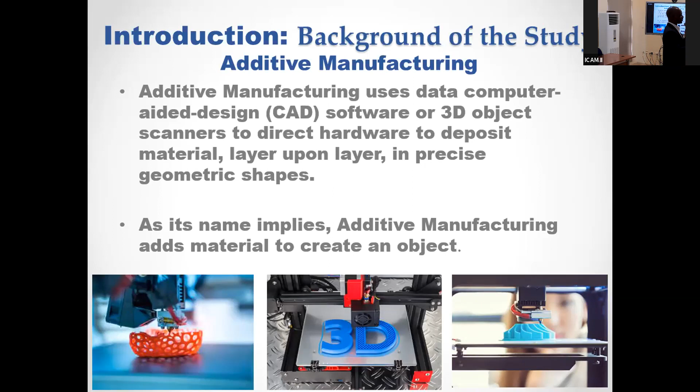We have been seeing that since we came here. Now, what is the process here? There are two processes involved, either fusion-based or solid-state-based. Our approach is additive friction stir deposition, under mechanical deformation based. So our work is to combine AM and friction stir welding. It is a combination of the two, and that forms the base of our study. Okay, next slide.

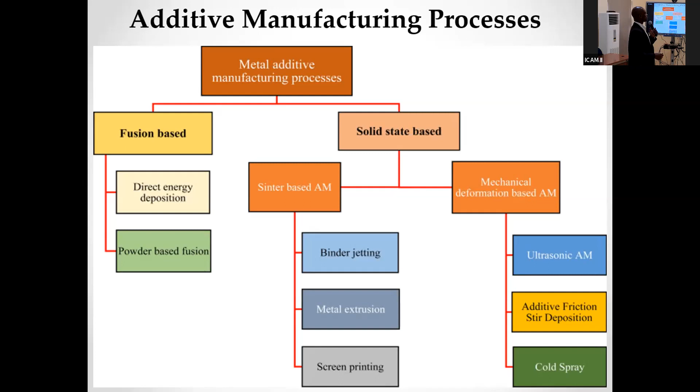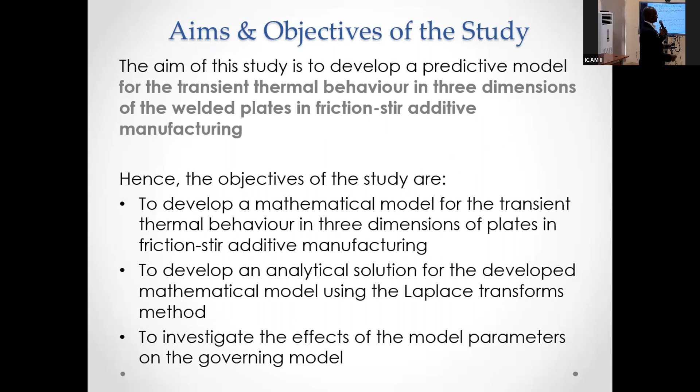Next slide. Now, the aim of this study is to develop a predictive model for the transient behavior in 3 dimensions of welded plates in friction stir additive manufacturing. And there are 3 objectives. Number 1 is to develop a mathematical model for the transient thermal behavior in 3 dimensions of plates in friction stir additive manufacturing, to develop an analytical solution, and then also to investigate the effect of the model parameters. Of course, we also validate the model using some experimental results.

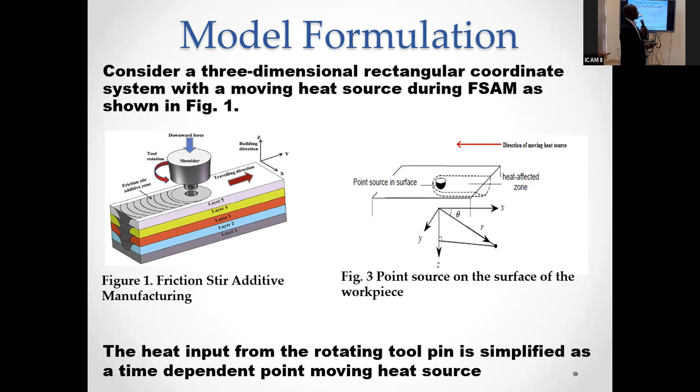So we see the process here. As the tool is moving, it is depositing the material. This is a friction stir additive manufacturing process. And this is a schematic diagram. That's the way it works. The heat input from the rotating tool pin is simplified as a time-dependent point-moving heat source. So the moving point heat source moves along the plate, and that's what we model for.

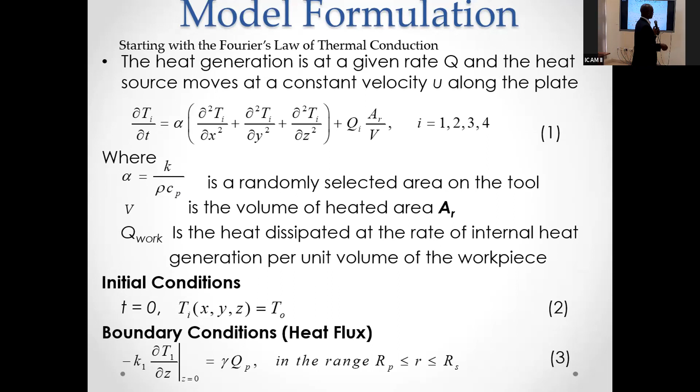Now, we start with the Fourier law of thermal conduction. That is equation 1. You can see that it is transient and is 3-dimensional, even though a linear equation. But by the time we look at the boundary conditions, we see how it becomes complex and the method we apply in the solution methodology. We see the parameters used there, the initial condition because it's time dependent, and then the boundary condition.

We have the parameters, they are defined. QP is the heat supplied by the plane. K1 is thermal conductivity of plate 1, because we have several plates, plate 1, plate 2. So we're going to look at different conditions: when we have perfect thermal contact, when we have imperfect thermal contact, when it is time dependent and when it is time independent. Next slide.

So there are some basic assumptions here. The first one is that the workpiece is homogeneous and isotropic. The material properties are uniform in all directions. The boundary conditions of the thermal behavior are symmetrical. In other words, X and Y are symmetrical from the center line during the manufacturing process. The thermal properties of the workpiece are constant. There is no phase change during the manufacturing process. The major heat supply is also constant. That's our first assumption before we remove the assumption.

So for case 1, we assume that there is perfect thermal contact from layer to layer. No heat input, no heat exit. It is contact. And then case 2 is when we have imperfect thermal contact. Case 3 is when we have imperfect thermal contact, and it is also time dependent. We're looking at a transient thermal behavior.

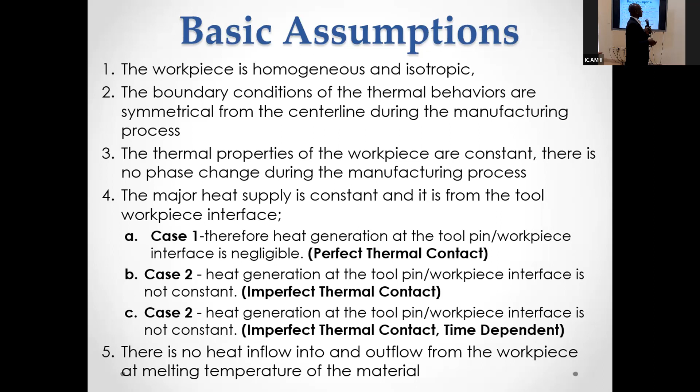Now, there's no heat inflow and there's no outflow of heat for the workpiece at melting temperature of the material. The heat generated at the moving point heat source and workpiece interface is considered to be invariant with X and Y. In other words, we have said that it's symmetrical to X and to Y. So there's no variation of the heat generated there.

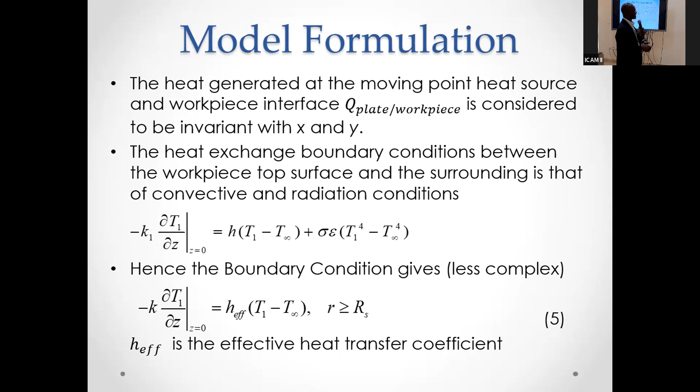And then the heat exchanging boundary condition between the workpiece top surface and surrounding is that of convection and radiation. So we have conduction from the plate and then convection and then radiation. And so we have that equation there. But by the time we were doing the modeling, the radiation term was becoming very, very complex. We had to linearize and reduce it to conduction and convection.

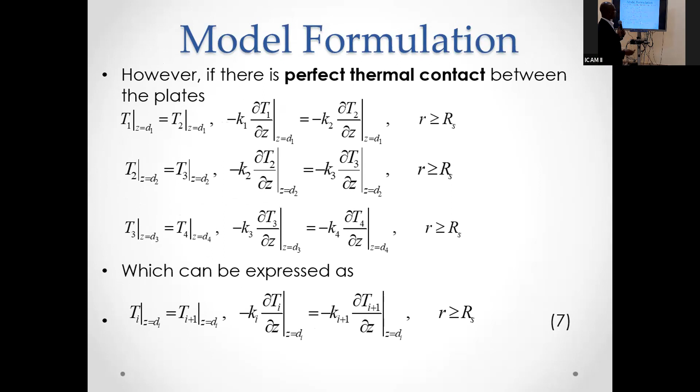Now, however, if there is perfect thermal contact between the plates, then we have this. That means that in between the plates, there is no heat loss and there is no heat input. It's perfect thermal contact. And so we have equation 7 that summarizes that for us. Now, that was the top surface. And then at the bottom, heat is lost by conduction. And the model for the support and the base is complex.

Okay, sorry. At the bottom surface, heat is lost by conduction, and the model for the support base is complex. But in order to overcome the complexity of the model, we made this a convection condition, because the bottom surface will rest on everything. But we assume that it is convection, and that gives us equation 8. Now, for all other boundary conditions, for Y and for Z, we assume that they have the ambient temperature.

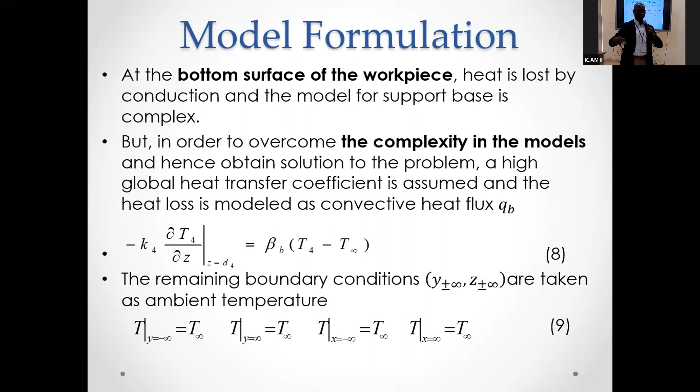Okay, next slide. Now, going through equations 2 to 9, when we substitute into equation 1, we have a very complex equation. Very complex, and we resorted to using this method, the differential transform method. It is a very good method for linear and non-linear differential equations. And because it's a 3D problem, a transient 3D problem, we use the

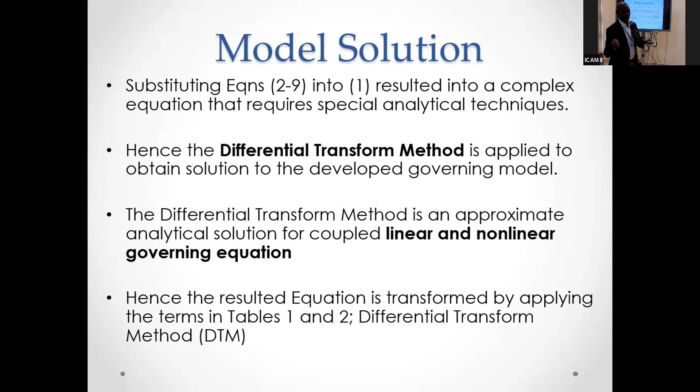Now, this is the first time we'll do this study; we've not done an experimental study on this. One thing is to develop the model, but if the model is not validated, either by a numerical method or, more importantly, an experimental method, you're not really doing it at all. So what we did was to compare our results with what had been done. Somebody had done the work on aluminum alloy using friction stir welding, and since our method is from friction stir, we compared our result.

And we discovered that our results were maybe not in perfect agreement, but in good agreement with the experiment. We picked the points at 11 millimeters on the plate, 15 millimeters, and 17, and we have, though not perfect, good agreement between the two of them.

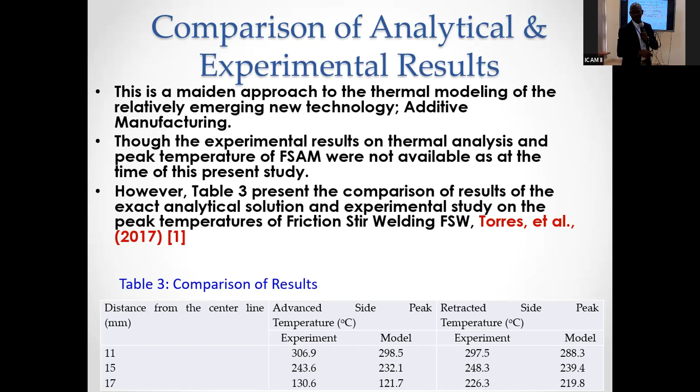And so we now look at the temperature distribution. Figure 4 is the temperature profile for different depths of the material from 8 millimeters. What we did was to pick X at 8 millimeters and then look at the depth, which is Z. And so we have this result. You see that at 8 millimeters, the temperature is over 1,000

degrees centigrade. Then for this, we kept it at 8 millimeters and at 16 millimeters. So we have that at 8 millimeters in X and then 2 millimeter depth, that is Z. And so we have that result. So the next slide.

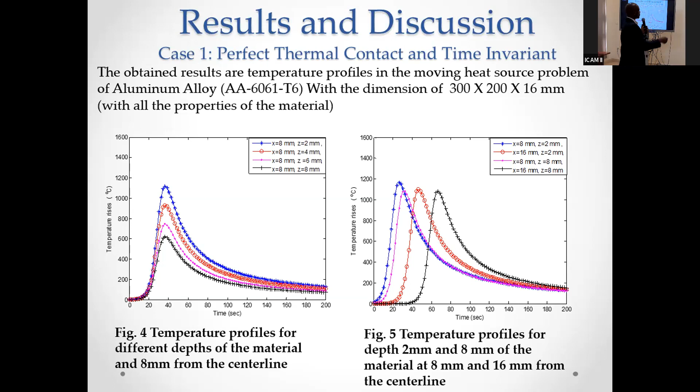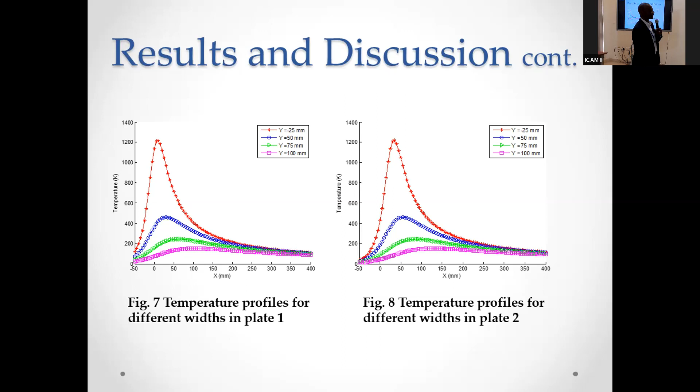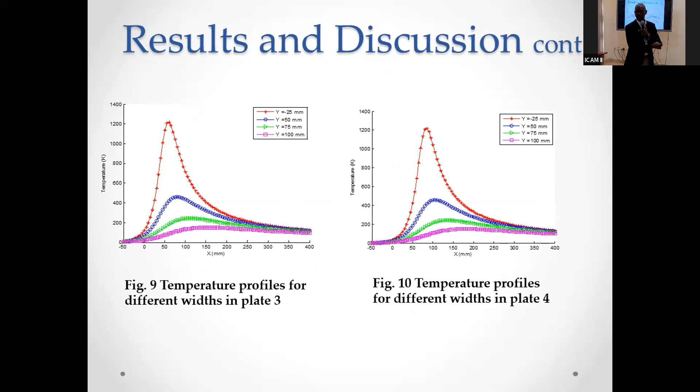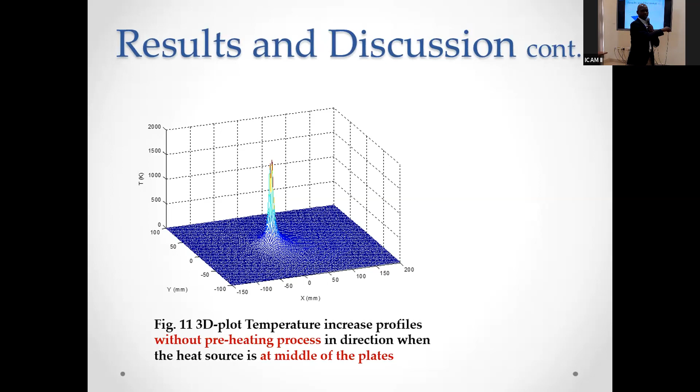Next slide. We also did a 3D plot for this, with preheat and without preheat. For without preheat, we put the temperature at the middle of the plate and we have this profile for the 3D. We've already done the 2D and now the 3D. Just look at the different points. This one is without preheat. We pick 25 millimeters from the edge of the plate the same way. This is the preheat. You see that the peak temperature is higher here than at this point.

In conclusion, in this study, the analysis of three-dimensional transient thermal behavior of bodies processed by friction stir additive manufacturing is studied using DTM, differential transforms method. The obtained results from the simulations for various observed points show typical features of the temperature profile, and this provides critical analysis of the factors influencing heat flow models in a moving heat source. Hence, the developed model and its analytical solution provide the benchmark for obtaining temperature profile in a point moving heat source during additive manufacturing process.

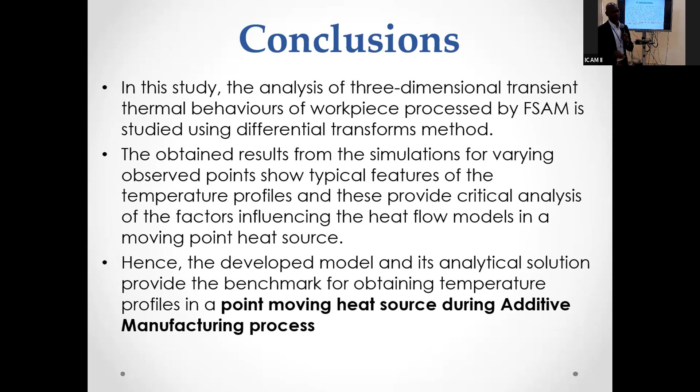Next slide. The paper we compared our results with is the paper published in 2017. As I showed earlier, though not perfect, there was a good agreement. All other references are in the manuscript. Thank you.

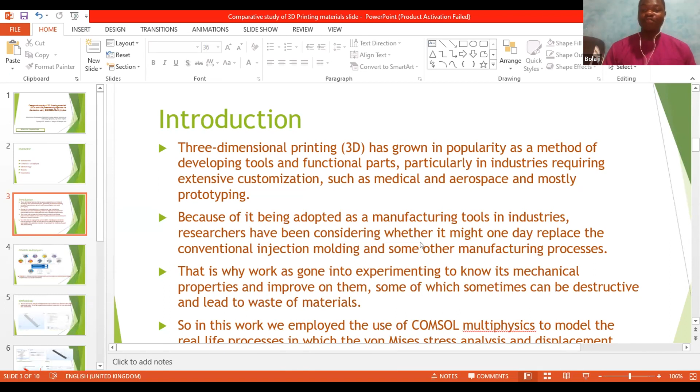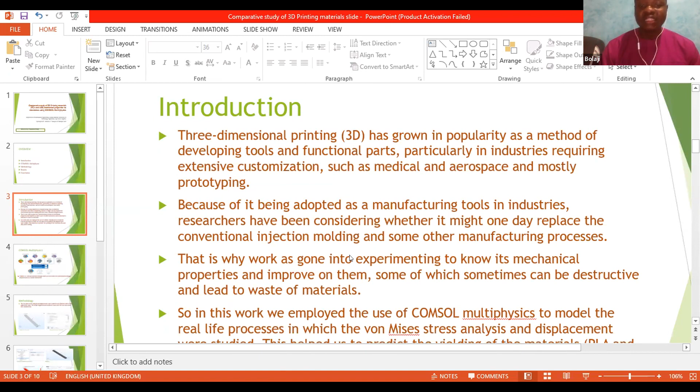We want to get things done as quickly as possible. Now, because 3D printing has become so popular as a manufacturing tool in industry, researchers have been considering whether it might one day replace conventional injection molding for plastics, or casting for metals and other manufacturing processes. That is why work has gone into experimenting to know its mechanical properties and to improve them. When it comes to knowing mechanical properties, sometimes this comes with destructive testing, leading to waste of material, like tensile strain tests and other mechanical tests we know.

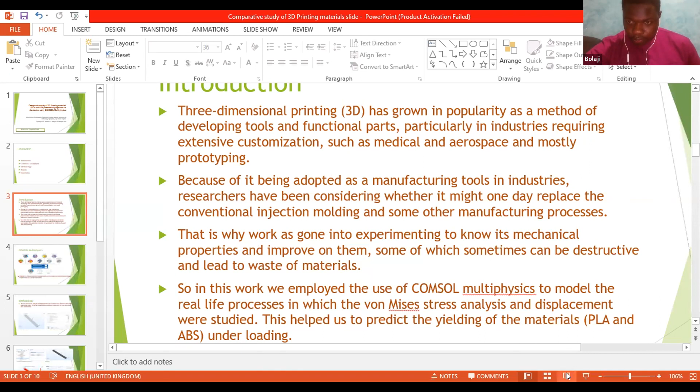So in this work, we employ the use of COMSOL Multiphysics. We know we have other materials apart from PLA, polylactic acid, and ABS, acrylonitrile butadiene styrene. We also have metallic alloys used as materials in 3D printing. As additive manufacturing, we have other processes apart from fused deposition modeling, such as selective laser sintering. But for this paper, we've employed a comparison between PLA and ABS using a virtual environment. As was rightly mentioned earlier, there is nothing we cannot model except spiritual problems. So we were able to use this virtual environment to model, meaning we are not physically destroying materials. We are doing everything on software, which makes it cost effective.

So what is COMSOL Multiphysics? Let's start with that.

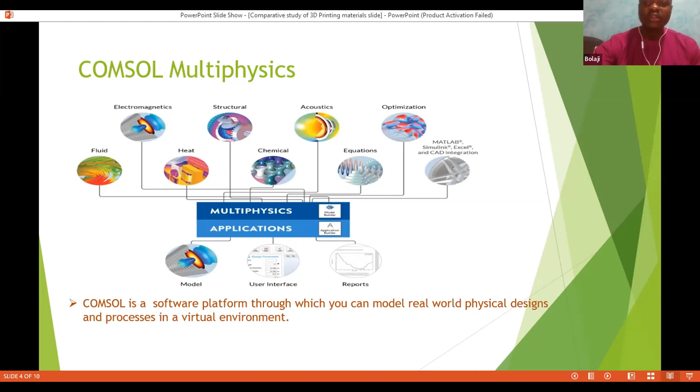So this is Comsol Multiphysics. In order to use Comsol Multiphysics in our paper, the methodology that we've employed is through the use of the von Mises stress analysis and displacement, in which we were able to study two different direct load application processes.

And so if we look at the second interface here, we were able to create adequate definition. What that involves is we create the parameters of the component to be modeled. These parameters will be strictly created in the window. If you look at it, we can see electric current, heat transfer, solid mechanics, and some other ones. So in this, we choose solid mechanics, which is the parameter for our plate.

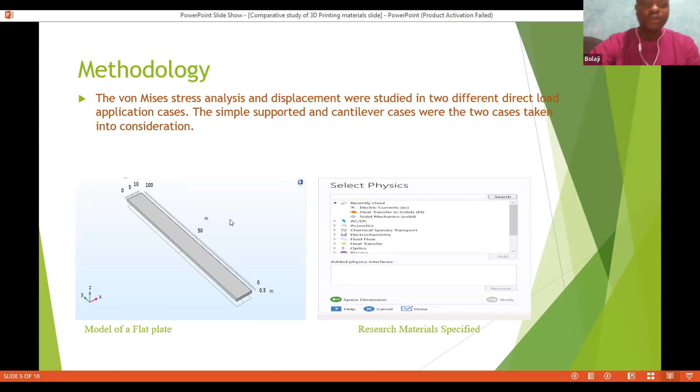And the other thing that we were able to do is create the research material, to specify the research material. This involved the use of built-in parameters, already built in the software. We created the parameter in a blank material option. So if we look at it here, we can see an example of it. We have the ABS material. The other material that we also created is PLA. So these are the material creations.

And also we mesh it. If we recall, when our 3D printer is printing the material on the hot bed, one thing that we see before it covers everything, before finishing, is some mesh and some interlockings. The 3D print software was built in the sense that it will create the material to have less weight and to be stronger than other material. So we were able to define it inside the software as well.

If we look at the other diagram here, we can see it being simulated. So we can see the displacement field result. We can see how the material is being displaced as well. This involves the use of this process for each of the solid mechanics physical properties to be studied. And so that is how it is done.

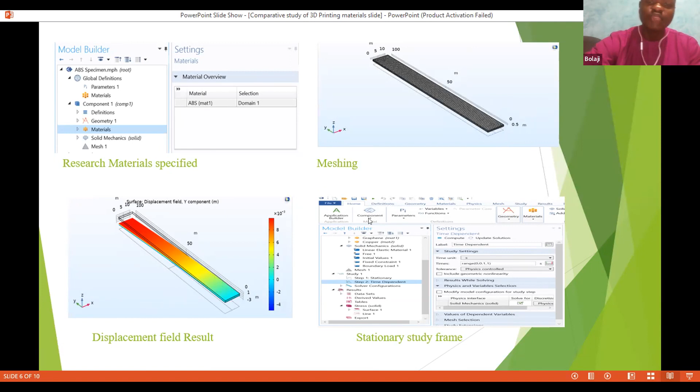So if we look at the last diagram here, the stationary study frame. So we have to define the environment in which the material has to be, talk about the temperature, and we know that these materials are temperature sensitive. PLA has a lower temperature than ABS.

Now, what that means is that PLA is able to withstand more bending and more stress than ABS. And ABS actually is harder than PLA. And when it comes to hardness, this sometimes doesn't define the strength of a material. They can be, for example, like a glass. A glass can withstand scratching and can withstand other impacts to the surface, but which is quite different from a rubber band.

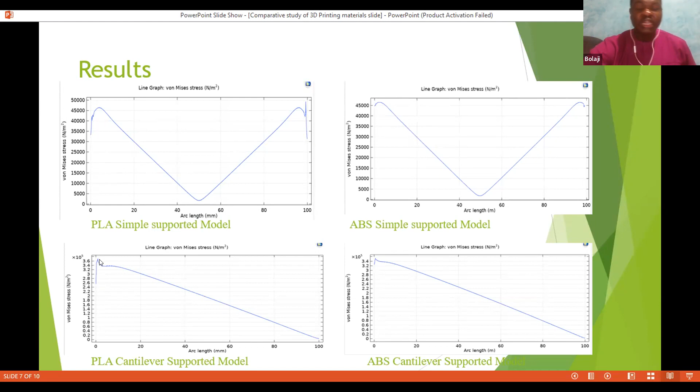If you look at it, the rubber band can be stretched for a longer length before it exceeds its yielding point and it breaks. Also, the cantilever supported model for the PLA and the ABS. If we look at it again, we can see that the PLA was still able to withstand more stress than the ABS. So what does this mean?

In conclusion, PLA and ABS models were supported at different ends, it might be one or two ends, they will experience poor ductility and are liable to break more easily on application of low stress. Take for example, I put a plank on two supports of blocks, and then someone sat at the center. So that means the plank is liable to break under one or two supports.

And also the use of PLA provides more ductility property than ABS, although not too much, but it provides even more than ABS. And finally, there is an adverse effect on the strong property of ABS when in use over PLA. So those are the comparisons that we're able to make in the case of PLA and ABS. So thank you so much.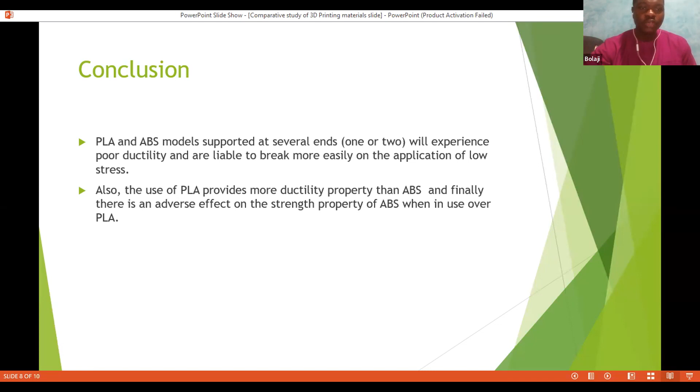Thank you, Dr. Matuji. We'll be taking questions from this side. Are you still there? Yes, yes. Questions from this side, Dr. Matuji? Okay. Yes. Okay. I give you the second microphone.

Thank you for the wonderful presentation. The question I have is the property that you have investigated. Is it not possible for me to know those properties without simulating them? For example, we are considering PLA and ABS. I'm a civil engineer. If I consider the property of steel and concrete, I can tell you without going anywhere what the reaction will be when you subject it to load.

Because what I can see here, you have a cantilever and you made them with PLA and ABS. So if I make a cantilever beam of steel and concrete and I apply load to them, I can tell the one that will do better. So what is the difference, or what are you trying to achieve by these simulations of having the displacement functions and the strength parameters, since from the physical properties, you can easily determine all those things?

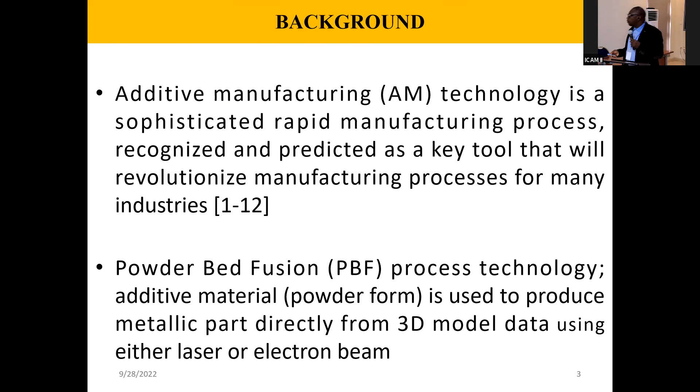Powder bed fusion is one of the methods of additive manufacturing, using powder form to produce metallic parts directly from 3D models using either laser or electron beams. In this current one, I was privileged to have worked with Precision ADM, an additive manufacturing company in Canada. They use powder fusion processes with direct metal deposition to produce component parts for aerospace, military, and other applications.

For this particular material, I used cobalt-chrome. The challenge of that company at that time was that for this material they were having a problem of porosity, and customers had been complaining. So the challenge for us as a research team was to simulate the product and assess the level of porosity and whether the material would exhibit what had been seen in the industry.

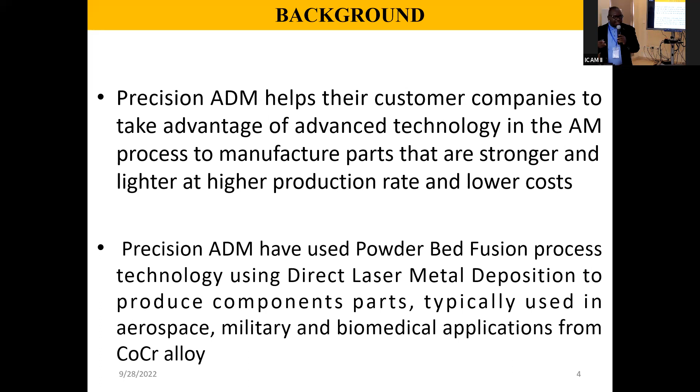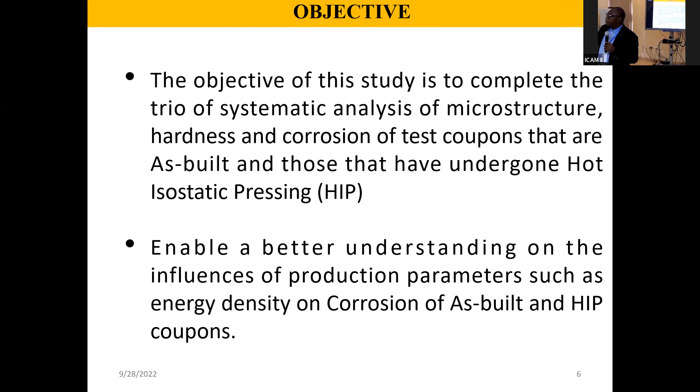So we have designed energy density processes, essentially low energy density, and we have the recommended energy parameters from the industry. Oftentimes when you buy this powder, the original manufacturer will give you parameters that they consider optimal. So what we did was to vary these parameters around the recommended energy density, going to high and low energy density parameters.

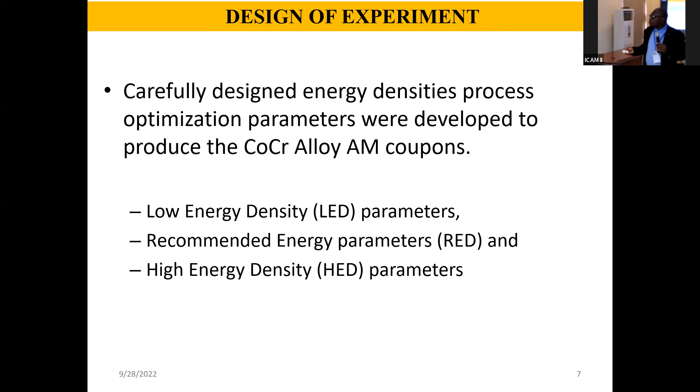For additive manufacturing, one quality process that is normally used is HIP, known as hot isostatic pressing. In essence, it applies heat and pressure simultaneously to reduce the defects commonly associated with the process, through a combination of plastic deformation, creep, and diffusion.

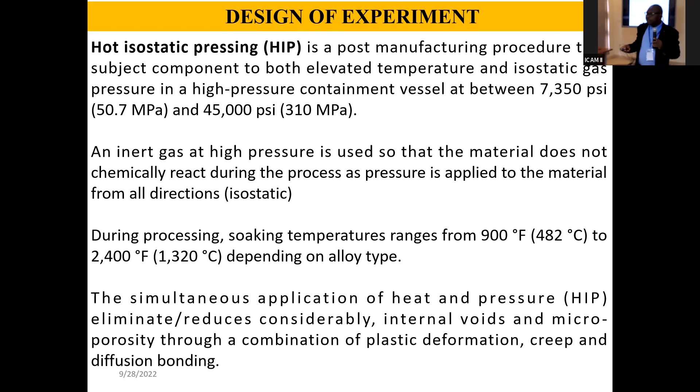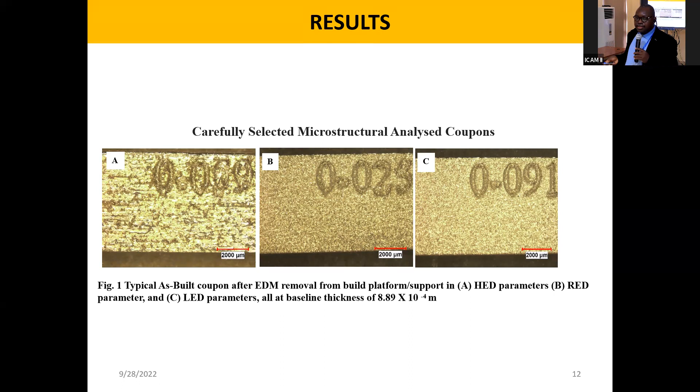So this is typical as-built. Depending, as I said, on the numbers, this will be high energy density, this is recommended energy density, and this is low energy density. From the surface appearance, you can see evidently there is a difference. This is looking at the optical image of the as-built, and we can see that the recommended has the lowest, the high has the highest, and the low is intermediate.

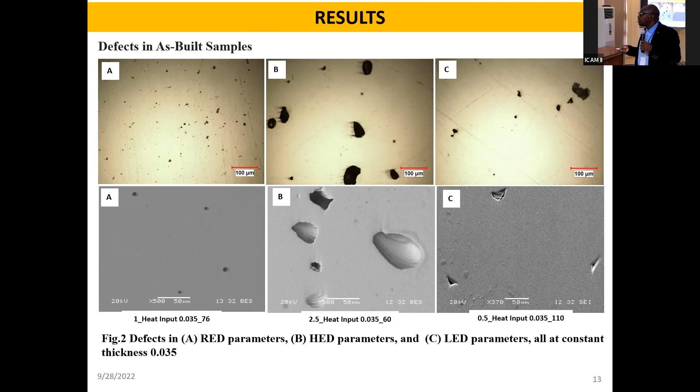This is using standard recommended to high. You see the nature of it, especially the incomplete fusion. Can you see that? So, I quantified the volume fraction of this defect using ImageJ analysis. And I found out that, irrespective of the material, the recommended energy density actually produces the lowest defect, while the higher and the lower energy density are higher, because one is not consistent, the other is not consistent.

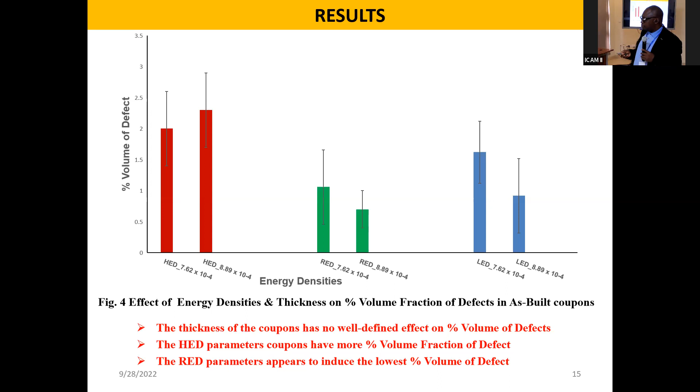Furthermore, after HIP, the process which I've explained, I noticed that the effects of the as-built condition are actually neutralized or normalized significantly. However, heating has greater influence on the high energy density and the low energy density. This is instructive: for the low energy density, the speed is faster, which means production rate can be enhanced. Furthermore, a significant reduction in this was found.

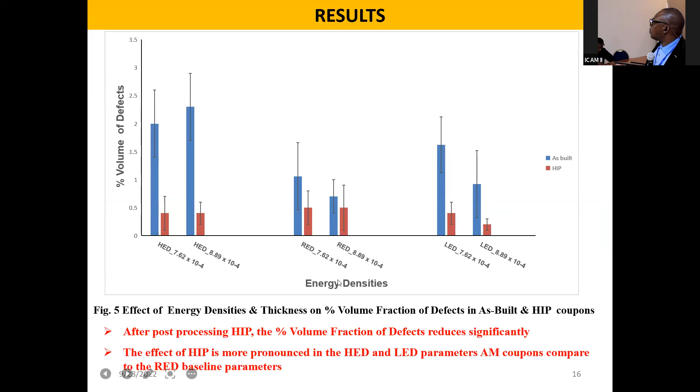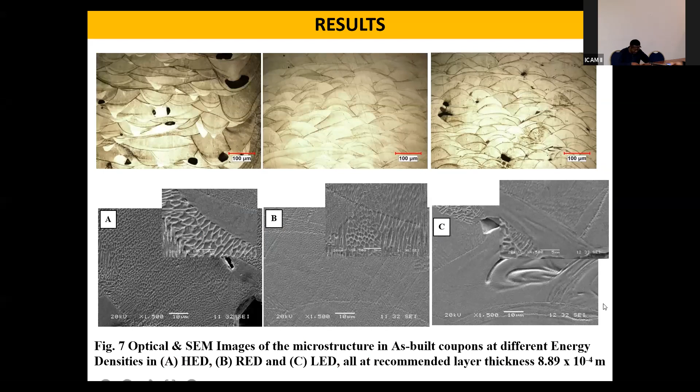This is the cross section of those samples in optical form. You can see the layer-by-layer deposition. And as I mentioned, you can see the major difference in the base structure. The recommended one is finer than the high energy density, whereas the low energy density is more fine.

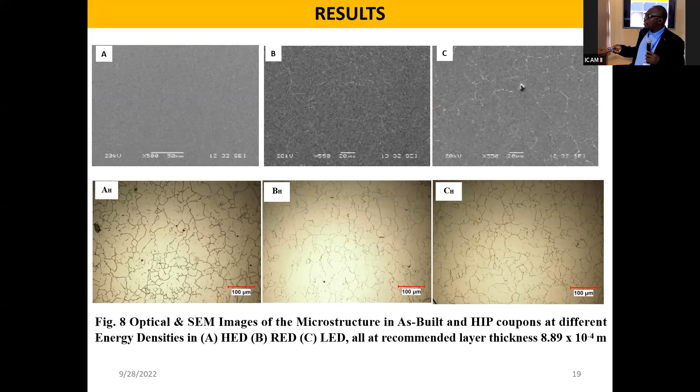But after heating, you can see that the microstructure is essentially homogenized. There's no relation to whether it's high or medium. So what is the summary from this investigation? We also looked at this: this is as-built, and after heating there's homogenization regardless of the condition.

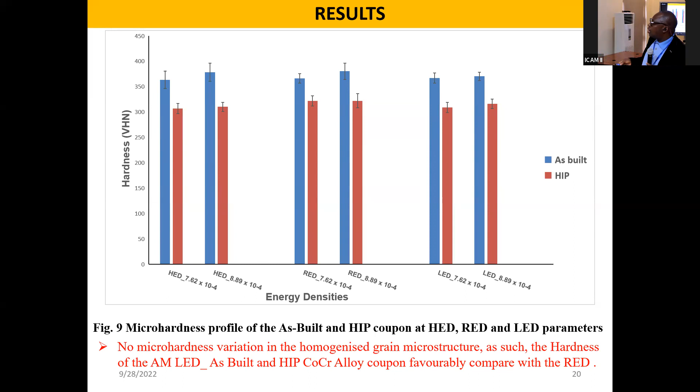So, coming to the corrosion, which is the main essence, we found out that the corrosion stability of this material depends on the energy density. For low energy density, if the thickness is high, close to 1 millimeter, the corrosion is relatively lower. Also, the recommended energy density appears to be more sensitive to corrosion than the low and high energy density.

Similarly, the combined effect of thickness and energy density shows that the higher the thickness, the lower the corrosion. And we found out that both the as-built at low energy density and at high energy density have relatively higher corrosion resistance. So we further investigated using a faster procedure to confirm this.

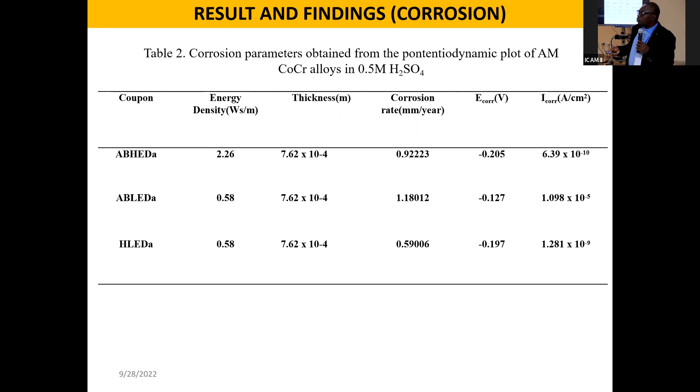So conclusively, from some of the previous information, there's no microstructural variation; the mechanical properties of the low energy density used compare favorably with the recommended one, and can serve as a substitute to the recommended baseline parameter, in view of the fact that the productivity using low energy density can be faster than the recommended

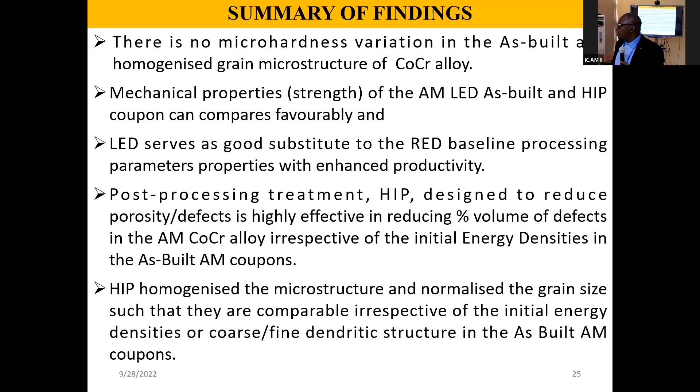energy density. Also, post-processing treatment, HIP, designed to reduce this, is much more effective for the high energy density and low energy density than the recommended energy density. But on the effect of corrosion, yes.

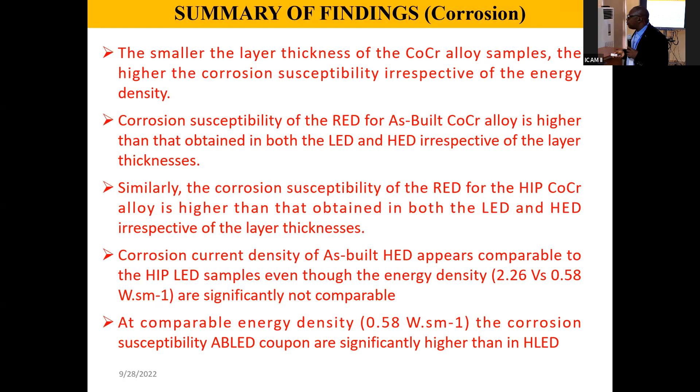And at comparable energy density, the corrosion susceptibility of as-built low energy density is significantly higher than the HIP low energy density parts. So finally,

what I found out generally is that while HIP is a statutory requirement for quality, it also has a fair contribution to stability. And for AM components, they can be applied where the certain requirement is not too critical. The AM component can be applied without post-production need, that is without incurring higher costs. That's my conclusion. And this is consistent with key findings.

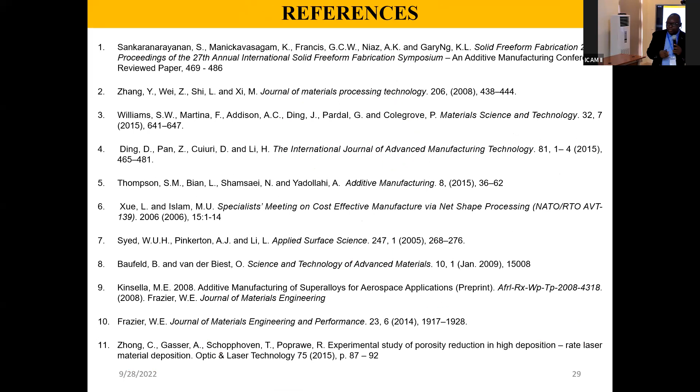Professor, you say your energy density is also high. A lot of stress to the camera, kept chasing you from here and there. That is high energy density. Questions? Yes. You will get an award for first shot. Thank you, Dr. Just a moment before you get your question, I want to get through my numbers. We are number 2. Number 3. And then we take 4. That's it. Is there anybody? Okay. My questions begin with those. I'm so glad that it is the department.

What do you mean by as-built? And I find out that the HIP one is better than that of as-built, correcting the effect of the defects, looking at all this porosity. If I have the material, because I'm a civil engineer, when I'm cutting my material, can I also keep that material if I find out there are defects in it? Is it possible for me to heat the material in order to correct the defect, or do I have to go into the microscopic before I can?

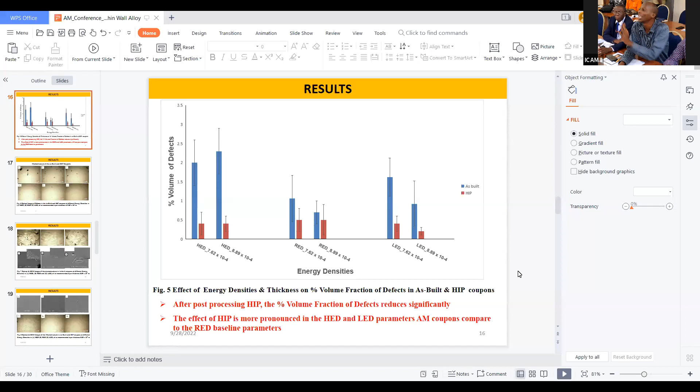Okay, that's one. What is the effect of energy density? What's the property? What will I achieve if I have high energy density? What is energy density? I've defined energy density. That was the formula. Energy density is a function of power over speed.

We are discussing the layer by layer condition, built additively, as shown in the video that we watched. So layer by layer. So when you produce it, that's high heat. So this energy density is a processing parameter, power over speed. So if the speed is very high, definitely the energy density is low.

If the power is not there, you can increase it; then maybe the energy density is high. As I said, for this one it's going to be power. I remember they always recommend optimal capacity. So what we have done is to vary away from those to analyze some other things. And as I have shown from the conclusion, irrespective of the way you produce it, consistently the recommended energy parameters are the lowest. But after HIPing, that effect is no longer there.

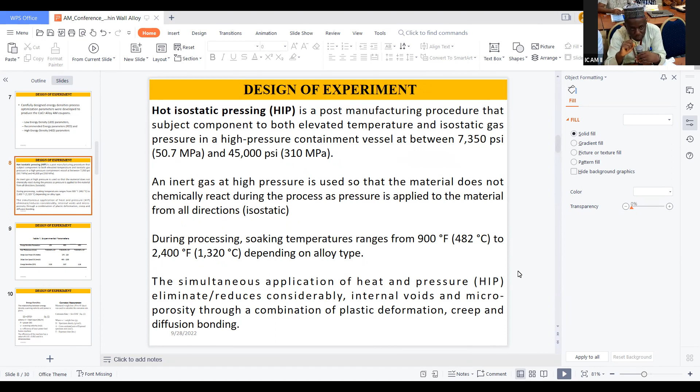I have one comment and one question. The first comment, which is basically an addendum to this, is that in material science, any post-processing technique is basically to enhance whatever property you have generated. And before that product is put in service, it is considered that the OEMs, the original equipment manufacturers, will have done their R&D and checked that this is the best way to go about it.

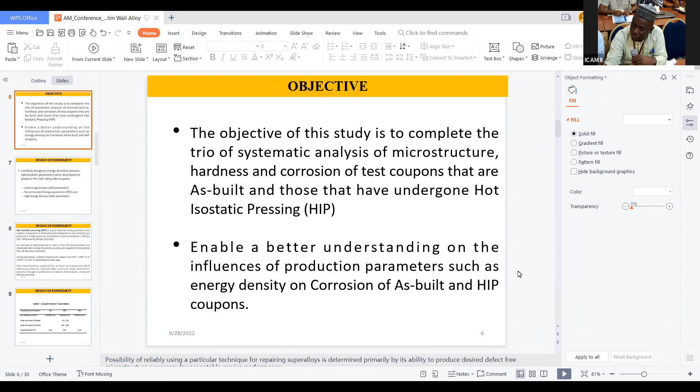So if you are doing HIP or whatever other process, it basically depends. You are compressing, or you are doing what we call micro welding. And that is where my question comes in. HIP has a limitation. What it does is compress the grains and resolve the defects. But what is the maximum defect size? Because if it is too large, it will not go. So at what level of deformation pressure, or what size of defect, can we ensure that if you take it through HIP, it will normalize as we have seen?

Otherwise, HIP is an additional process, so it's costlier: the machinery, the tooling. Why not just work around the OEM design parameters and save yourself the extra cost? And on the issue of indifference in microstructure, it is expected because you already normalized the pre-history of the material by HIP. So the question is, what is the size range of the defects that will encourage us to go for HIP? Thank you. I would say that was outside the scope of my work.

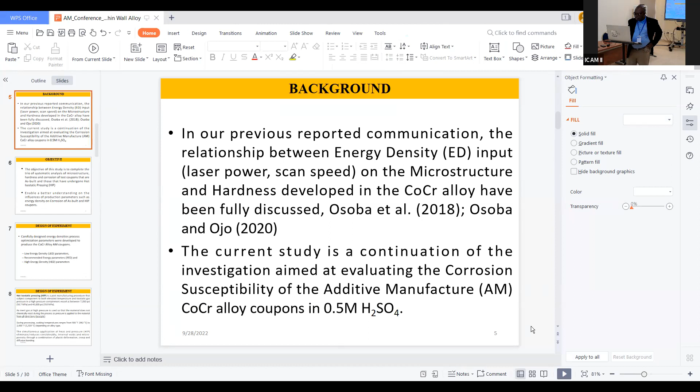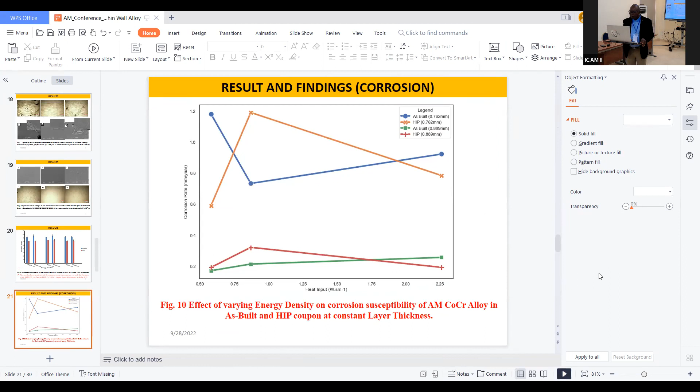I suggest when the figure looks like that, with just 1, 2, 3, 4 points, it's better to present it as a table instead. For something like this, you need more data points to justify a figure. But with few points, it's just a chart. The same applies to other figures. It's just a suggestion, noted. But here what we're looking at is just the accuracy.

Intermediate, recommended, and high. Okay. Thank you, Chairman. Thank you, Dr. Osoba.

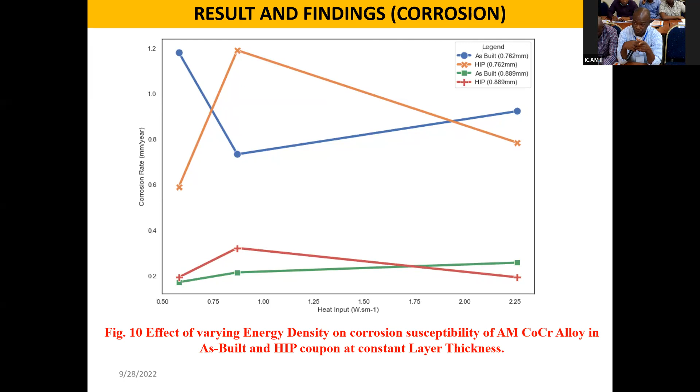In response to Dr. Osoba, we talked about the position. I'm also grateful that this was brought up because the steps are too large, which leads to error. So if you have 5 steps, then you will have...

Can we go to the second to last figure? That's the observation we should study. Yes, second to the last, please.

It appears that for this system we have a non-linear relationship. Because of this non-linear relationship, I can see some equilibrium points we can actually study. I can see some bifurcation points, some equilibrium points we can stay on and go deeper to find out what's happening there. We can move from the theoretical to the analytical.

For example, regarding what Dr. Osoba pointed to, if you want to do that analysis, we have to go back to that figure and use very fine step sizes. If you do very fine step sizes, you'll be surprised that we can come up with a rate equation that determines the optimality of resources. That's what the question is about.

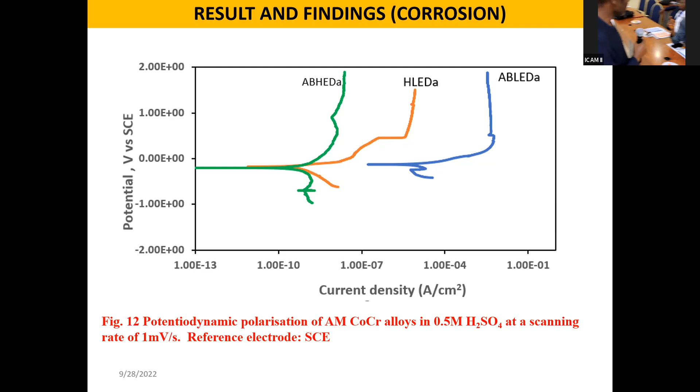We have wire, the machine goes on to lay another pass at the same time. The energy density that comes is determined step by step. For you to fuse the previous layer to the next one, it depends on the energy you are working with. If the energy is not sufficient, we have what we call non-fusion or lack of fusion. So there is a minimum amount of energy required. What you see is that the layers will be relatively close to each other because of the powder thickness or the layer that you are using.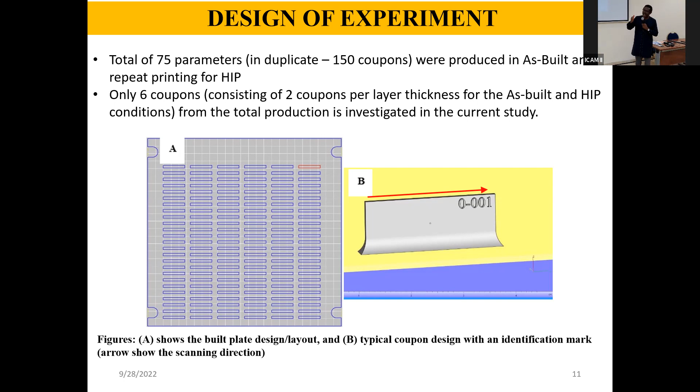Thank you very much.

Yes, the paper is for unified standardization.

It's your turn now, and I think there's one question.

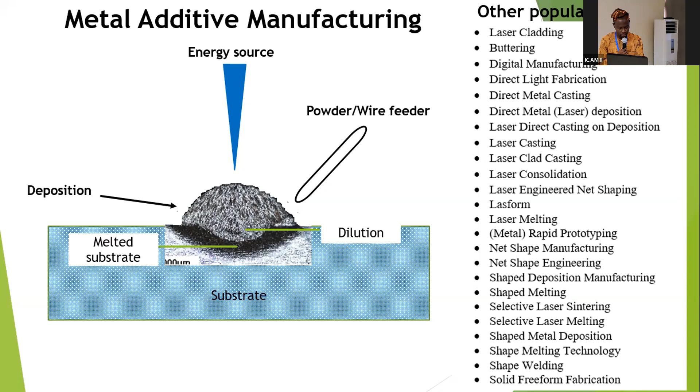The next slide shows the breakdown of the heat source. As I've said, we have laser, electron beam, and wire arc methods — you can see the breakdown. The feedstock is either in powder or wire form. The area we are interested in is using lasers and powder that is manufactured; there are other different forms of methods.

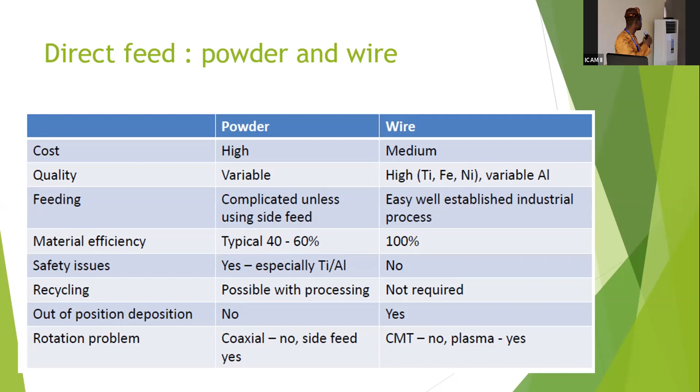This next slide shows us about build rates, as I said initially when we asked the question. Build rate is very important. This additive manufacturing we're talking about has different types, and each one has an advantage and a disadvantage.

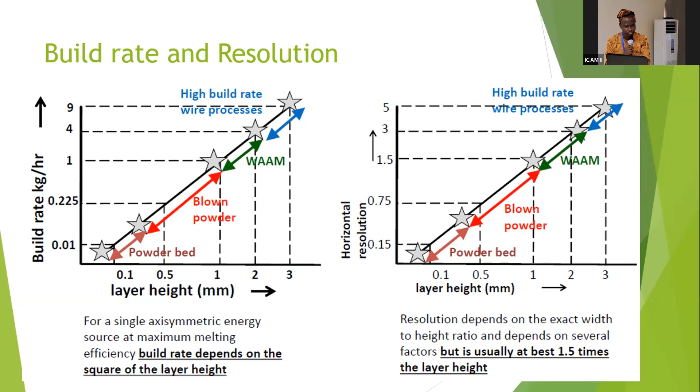The next slide is about standardization. If we look at my department, for example, we carry out a lot of experiments. But before you do the experiment, we always inform ourselves what standard we are working with, so that every other person can repeat the same thing and get the same result.

This has not been fully done in additive manufacturing, because everybody is doing his own thing at different times. There are a lot of different types of additive manufacturing machines all over the world, so results vary between them. The idea of standardization is to make sure that anywhere we go, with any type of machine, we can get the same result.

Additive manufacturing technology has the following advantages over traditional subtractive methods: design efficiency is quite better, it's cost effective, and so on. Standards are required to meet industry needs - you need a standard before going into the industry. With a standard, the end user will also benefit from having one.

The next slide talks about the roles of additive manufacturing standards. One, standards can be used for specifying requirements. Certifying bodies typically refer to publicly available standards, meaning the public can also make reference to what they deal with, and industries go in line with what has been specified.

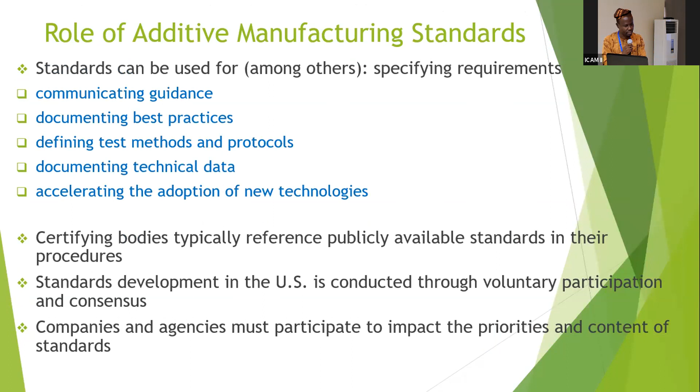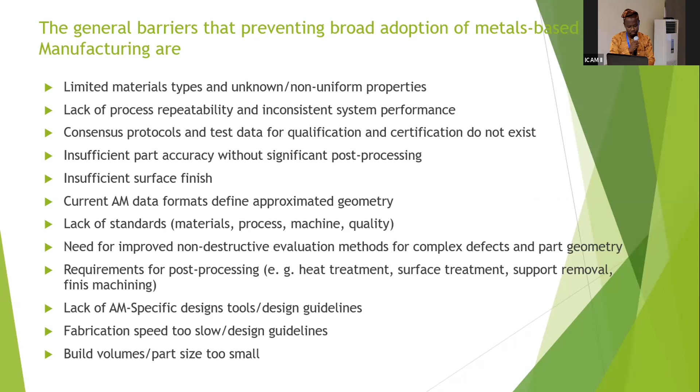So the challenges associated are also given, just to quickly round up. Yes, there are different organizations that are now working together to see how they can standardize additive manufacturing. One of them is the American Society for Testing and Materials. I do attend their meetings, and the funny thing is that Nigeria and South Africa are the only two countries that participate whenever ASTM goes on.

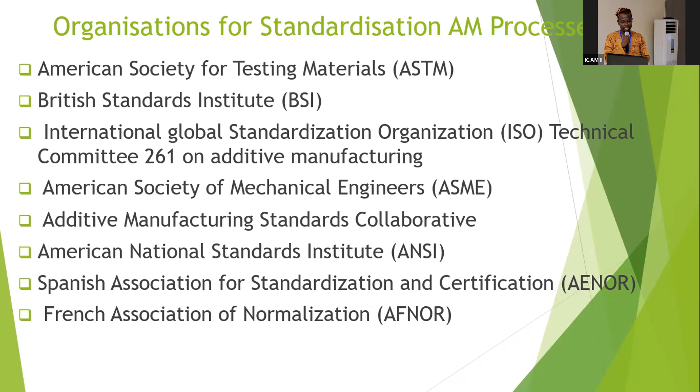In my own area, what I'm interested in is the parameters and the powder characteristics. How can you play with the powder? How can you play with the parameters to see if there is information that we can generate? So, as I've said, our research area is in two: materials and processing. We are looking at parameters and looking at the powder. And how do we arrive at this?

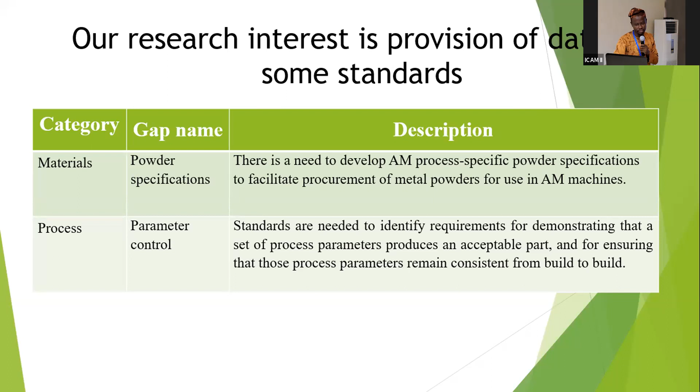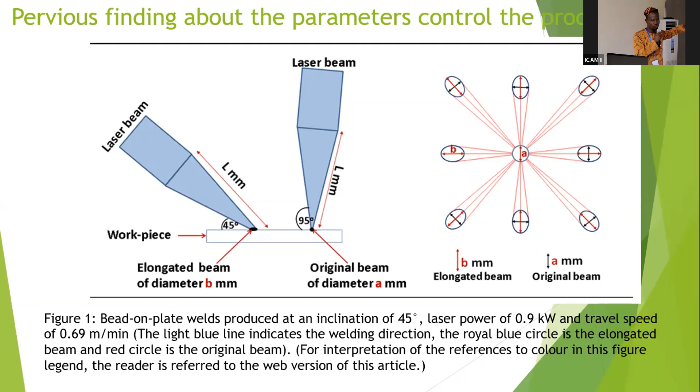We discover that at B, the beam is wider than the original one. So what is the implication of it? A simple illustration is this. Welding is more or less the same, to the best of my understanding; you are just building parts instead, so I use welding to illustrate this. In the original case, at 95, you can see a spherical shape inside the structure. But when the laser moves to 45 degrees, you can see how the profile looks. When you move again to a tilted side, you can see.

Which means when you are building parts in additive manufacturing, there is a very high possibility that you will not be able to get consistent, identical tracks. From our own view, a laser should be designed in such a way that the optical system that goes with it can modify the shape so that at every point the laser retains the same profile.

What I just showed you, this is the parameter that I used for that. The beam spot is 1.37 at 95 degrees. But by the time you move, it has increased in size to nearly 1.94 at an angle of 45 degrees. So if you look at the power density of the laser, which is laser power over the area of the spot, the area of the spot has increased and you keep the same power. What is the power there? The laser power, okay, 0.9 kilowatts. So the laser power used there is 900 watts. We use the same speed of 0.69 meter per minute.

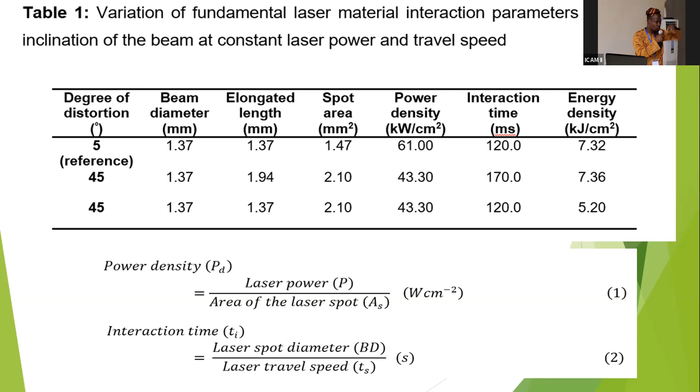If we succeed in our interest, we are able to establish that changing these parameters actually affects the build rate. So the next stage is what information you can provide in terms of parameters to standardize the system. And if you achieve that, these are some of the advantages that are applicable. Thank you very much.

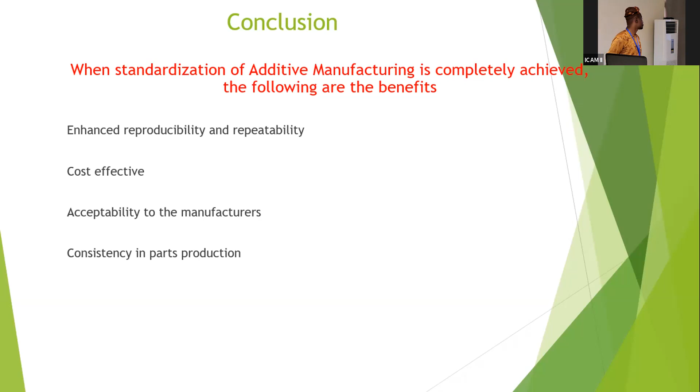Thank you for that. It's for us to respond now. Questions? Yes. One. Two. Two persons. Okay. Three. And finally, last.

You are right. The spot of the laser that comes in, if you have a powder whose grain size is bigger than the spot of the laser, of course, it's not. That's it. So it is better you go to nano level, nanoparticles. Then the powder will be at nano level. That will give you final products. So that then